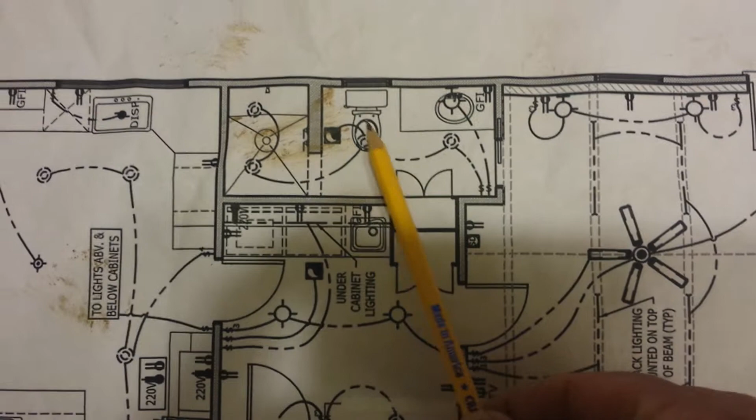Alright, we're starting to set up the electrical, so just a few questions came to mind. They put the symbol for the fan just here—does that mean we specifically want the fan here, is it a fine spot, or was it just drawn there and we actually want it somewhere else?

The next question is, we have a single outlet here. I didn't know if we wanted one on either side.

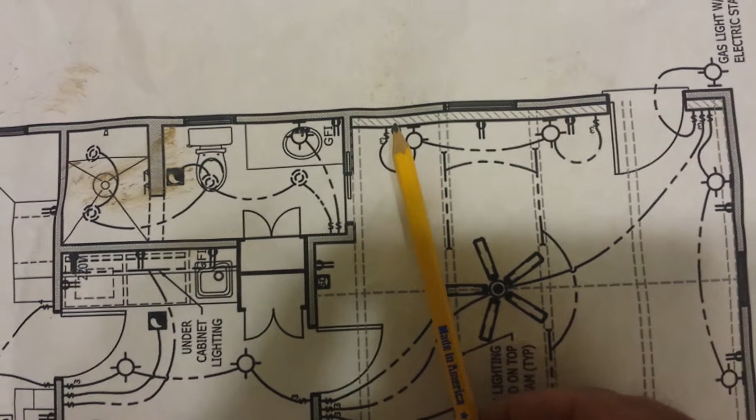These wall sconces, we know exactly where they're supposed to be. The switch for them is simply drawn with the circles. Are the switches predetermined per this diagram at exactly that distance, or is that switch just placed over this? How many inches basically from the wall sconce over is that switch?

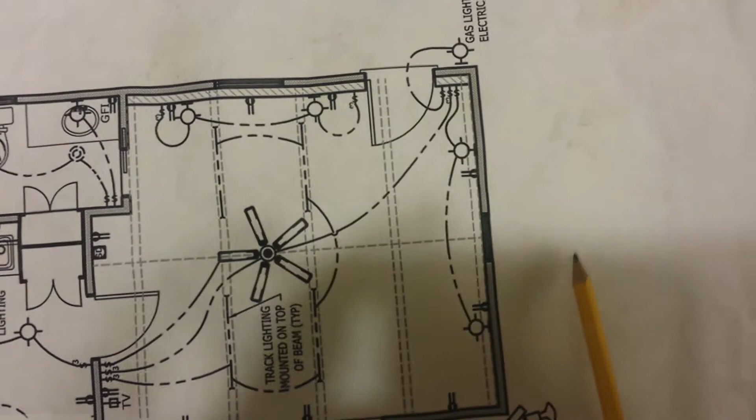Did we want two motion sensing lights out here, one here and then one here? I know that motion sensing lights don't work very well when you're coming straight at them, so it'll be difficult if we're walking this way for a motion sensing light aimed that way to see you. Whereas, I don't know if I'm just tossing stuff out, if we had one over here and you walked across its field of vision, it would see you more than coming at it. I didn't know if that mattered.

Just triple checking that this is a single switch for the fan, and then the light that's part of the fan is actually the three-way switch.

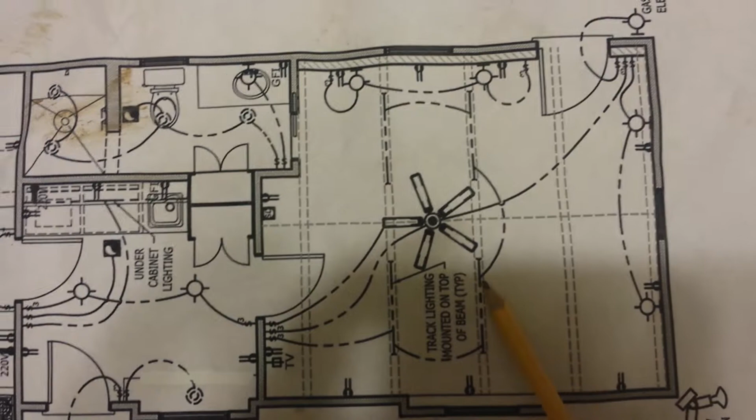The track lights, or rope light, or whatever these on top of the beam lights are, we need to find out what your architect has in mind or what you found online. The electrician knows of some different versions, and the ones he knows of take transformers, and those transformers end up having to be hidden in the attic space up above, with wires running to them. So if they're a different type, or LED, or this or that, we need to know pretty quickly what we're putting up here, so we can install it or prep to install it correctly.

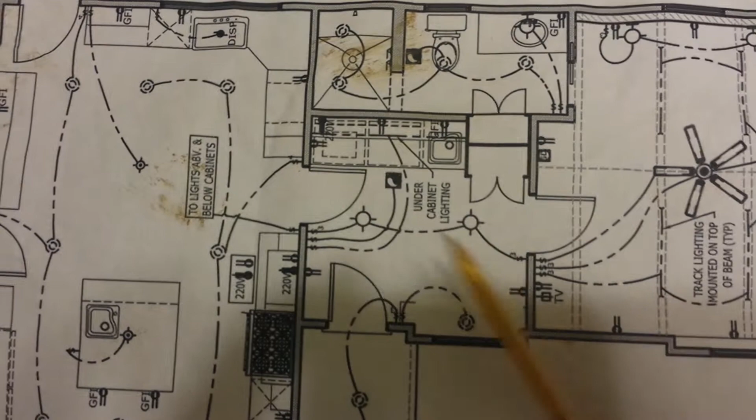This GFI right here by the sink—the electrician suggested we move it over, since you don't want an outlet right over your sink. The tendency will be to plug in an extension cord and have it go right over the water. So he was suggesting, unless there's a reason not to, that he always puts them just out of the way of the sink for safety.

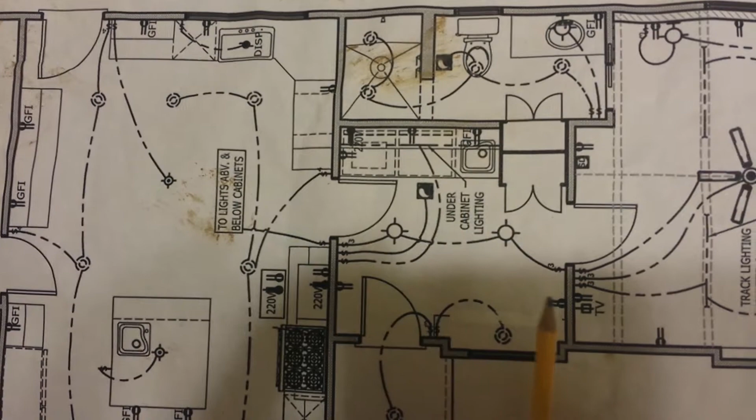Same question on this fan: is it just drawn there, or do we want to measure it out and put the fan exactly there?

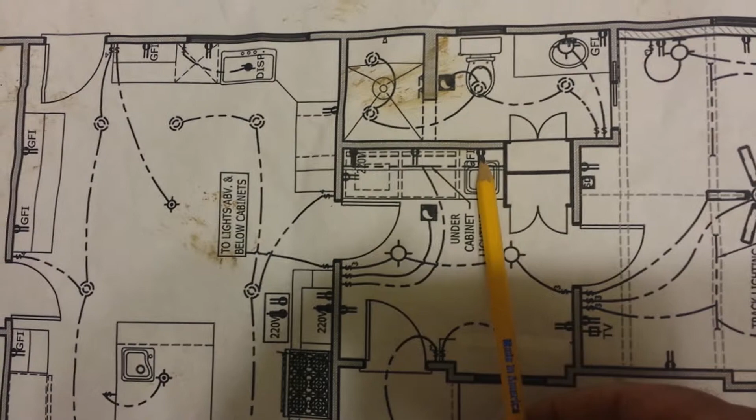This electrical outlet that runs the washing machine—is there also an electrical outlet above the countertop at this point? Because this one, of course, will be above the countertop. This electrical, I guess, is above the countertop—I think we already talked about that. And then they'll have both the 220 for the dryer, and we'll also plumb the dryer for natural gas.

Because we're no longer having the bench seat here, we can put electrical down here anywhere we want. If we want, this one can be moved, and that satisfies the 6-foot rule. Or let's leave it here and add another one somewhere along here.

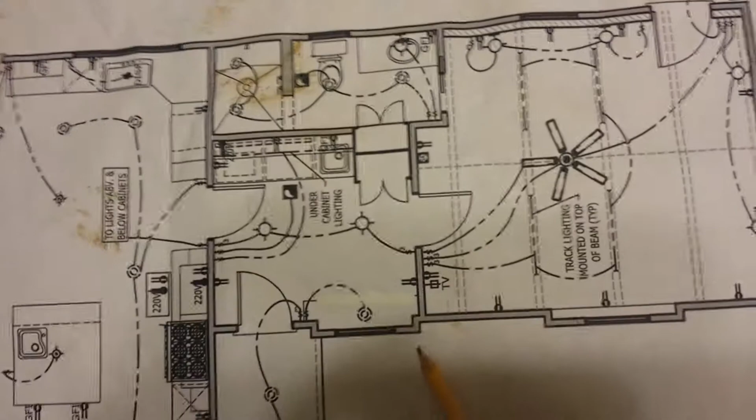If we did that, or if we move this one, the same question comes up: if we move this one to here or something, do we also want it to have an outlet on the other side, which would be an exterior one? And if there was an outlet here or here, whatever we did, would we want it to also go to the outside, so you have some exterior electric along here? Same question applies to any of these—do we also want it to pop through somewhere, anything to provide circuits to the outside?

That's all the little questions for now. When you open up any of these doors, do you want a light to automatically come on inside here? And likewise in here, do you want a light to come on inside? They've got those little switches built into the hinge, so you open the hinge and a light comes on.

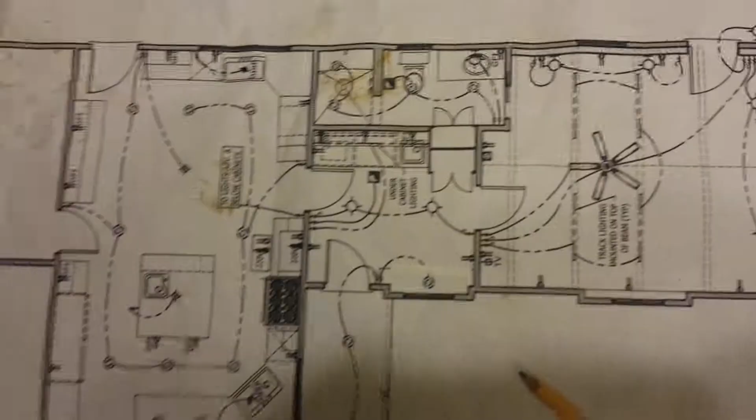The other question that came up is on these two fans. Which products exactly do you want? Unless you had a specific one you found that you really like, the electrician just casually mentioned to look online for Broan or NuTone, but there are lots of companies with lots of great innovative fans. So we need to know which one we want to put in, fairly soon.

The wall sconces, all the words that have been used have been talking about this box. Do you specifically want a rectangular shaped electrical outlet up on the wall for the wall sconce to mount to? Because the electrician said, oh, you put a round one in. Well, I'm not taking anything for granted. Is that a round electrical box, or is it a rectangular electrical box? And that'd be true for these wall sconces here also.

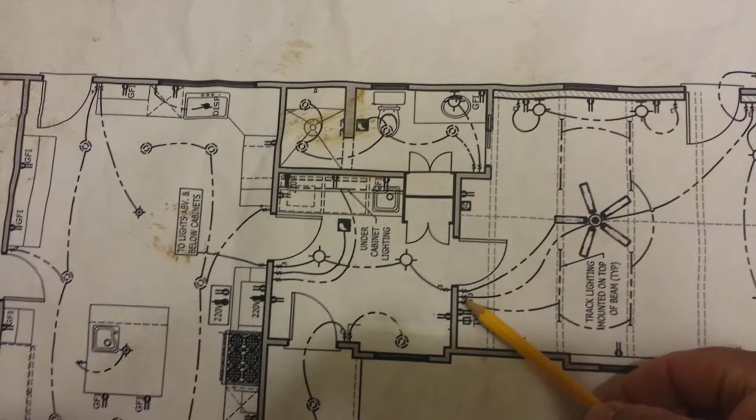Do we know the width of the door casing here? When we mount this box, it will have a switch plate around it, and how close does that switch plate come to the molding around the door, and how wide is that molding? We can put this anywhere we want. We just don't want to end up mounting it, drywalling it, installing the door, and then putting in some trim and go, oh, that looks stupid. So we just kind of wanted a little input on that. Likewise, you don't want to walk through the door and have to reach way over and wonder why you're reaching so far for switches.

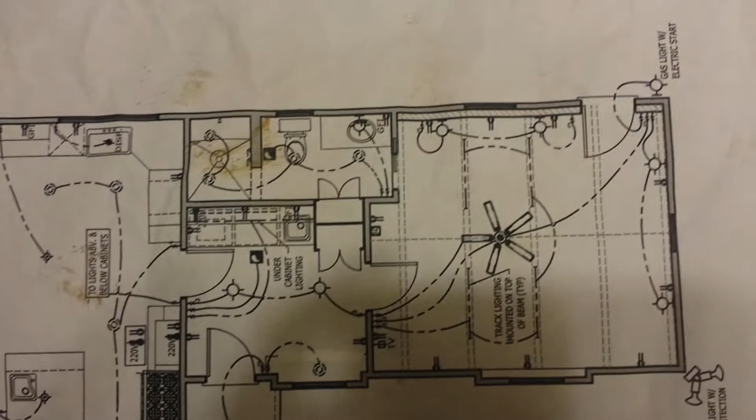Were this ever to get built in as a built-in closet, unless the closet did not go all the way to the ceiling, the smoke detector wouldn't want to be in there. So do we just plan on relocating the smoke detector if need be in the future? Or do we plan that this could really be a closet, and therefore we'll want to stick the smoke detector somewhere else? If so, do we leave that to the electrician's suggestions, or do you guys have a specific preference? And I have to ask, does this smoke detector have to be the kind that wires in? All the new codes have them all linked together, and most likely we'll end up having to do that.

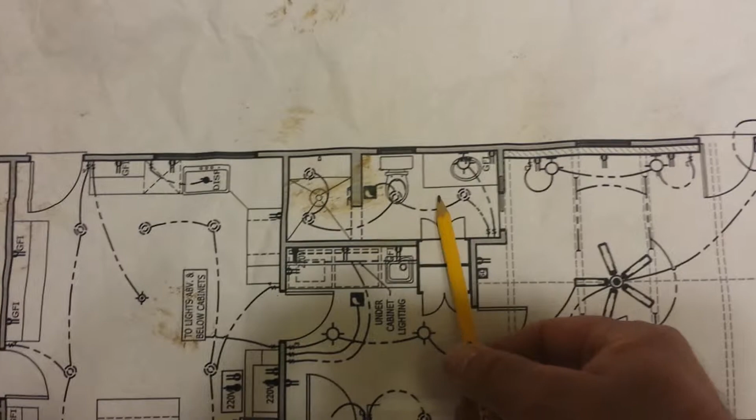It's showing only one circuit here that feeds the lights and the fan. According to the code, you have to have a separate circuit—I think they mean a separate switch for the fan and the light. So we probably want that anyway. If you walk out of the room and turn the light off, we might want this fan to run on a timer for a little bit longer to ventilate any odors. He was saying something about the code requiring separate circuits for the light and the bath fan, and I think that meant separate switches.